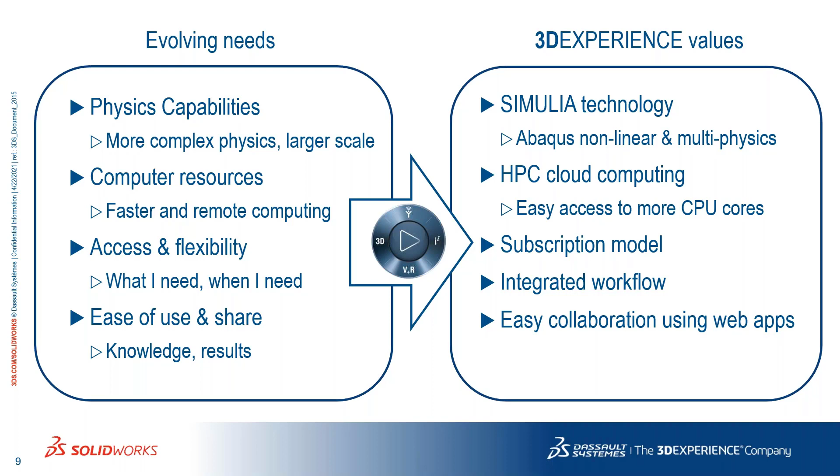So basically, as I already explained, Simulia is a trusted technology, and it is a finite element software which we are using for solving multiphysics as well as very complex nonlinear analysis works. And why this cloud computing is very helpful right now, that we're going to study now.

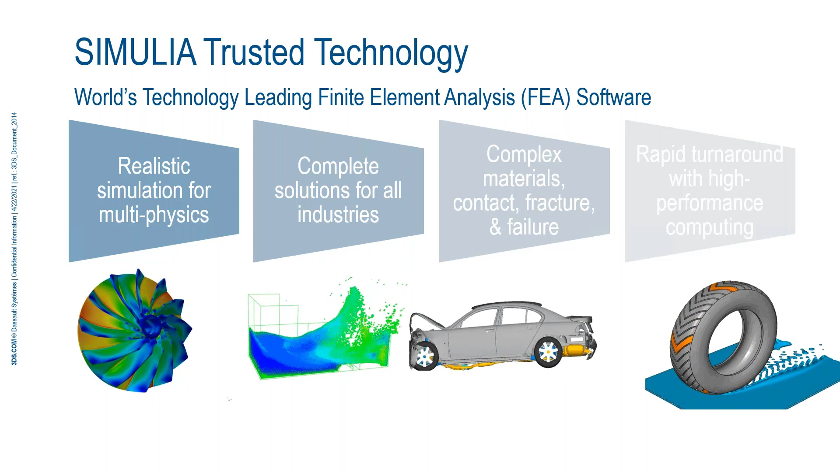Basically, Simulia is governed by Abaqus. It is powered by the Abaqus solver, and it is known for the high-end solution which is required for complete analysis of nonlinear problems, which includes various types of nonlinearity. It is also very good at solving implicit and explicit analysis on your products, which is required to perform dynamic vibrations, to understand and predict the failure of your products when used in real-time conditions. So that is a brief introduction about Simulia.

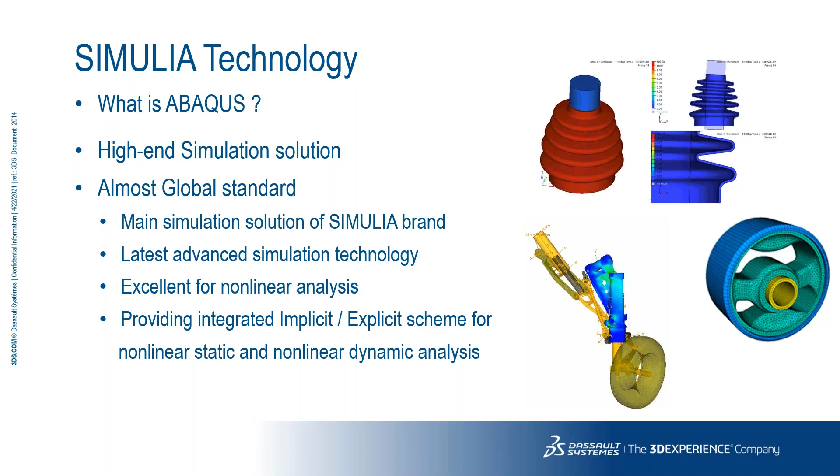So this is basically what we offer to you in Simulia. It comes in 3 different roles: structural designer, structural performance engineer, and structural mechanical engineer roles. So basically, you are going to get a complete solution depending upon requirement. These are different roles, segregated.

Like most of you are SOLIDWORKS users, you understand we also have a different segregation of capabilities based upon different verticals. Here also, based upon different vertical requirements, Simulia or the 3D experience has come up with a solution which is segregated as structure designer, performance engineer, and mechanical engineer.

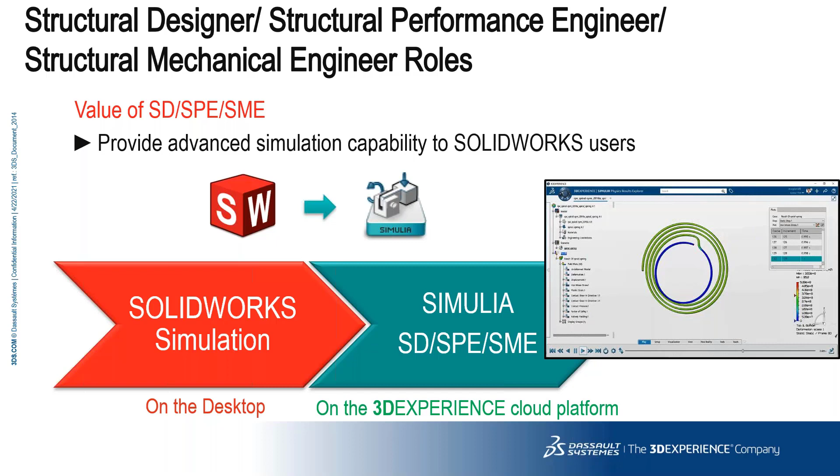So basically we are going to create or design the models inside SOLIDWORKS. As you already have SOLIDWORKS, with just a button you can upload that data to the cloud, and you can perform the analysis also.

So how does data import happen in case of a simulation connector? If a SOLIDWORKS user is already there, you can use it for loading this data from the desktop to the cloud. So basically, in various CAD imports, you can directly import it. We can add mesh creations, boundary conditions, and finally solve it and do post processing. So this is direct import.

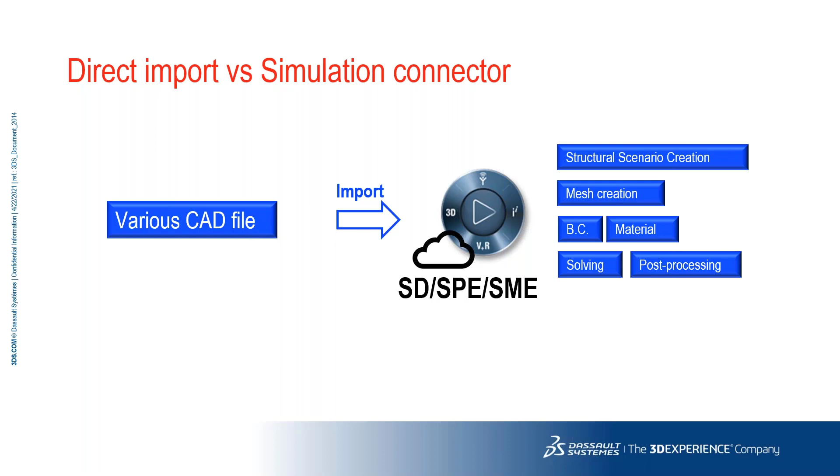Also we can do it inside Simulia, if you're having a SOLIDWORKS simulation already available and you require a higher end solution related to hyper elastic models, you can take help of Simulia, where it will help you directly import all this data, like material, mesh data, boundary conditions, whatever you applied in the present model itself. So it will take that out, and you can directly run that analysis and see the results. This saves a lot of time in replicating the same setup again.

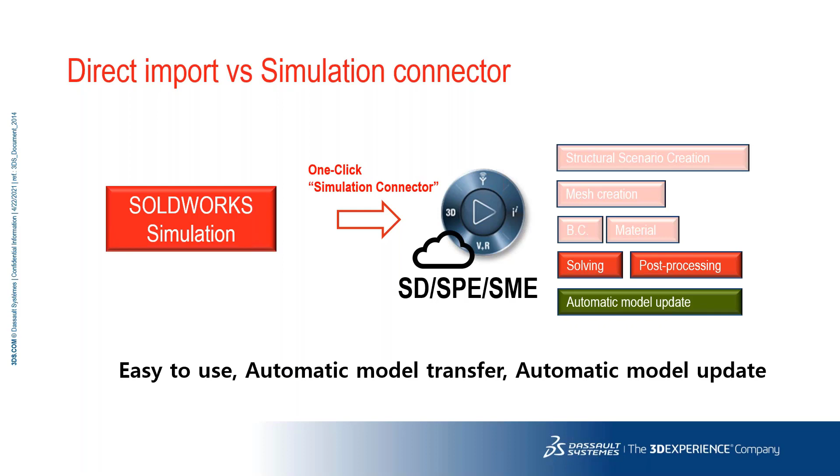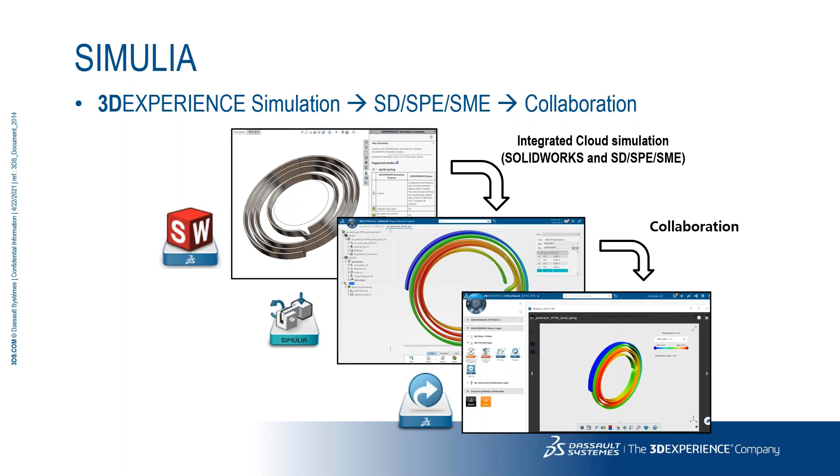It is easy to use and very automatic in model transferring. If you have any model changes to update, it will run very fast in a few clicks. So this is the workflow you are seeing here. This is a model which has a simulation, suppose you have already set up and assigned all the material properties and boundary conditions. You'll get options where you can just click on the button here. This is one tab you get, the simulation connector. Once you click on that, it will be uploaded to the cloud, and finally you can run there itself. So it seamlessly collaborates with SOLIDWORKS, with Simulia, achieved just by a simple click of a button.

Before going to the further part of the webinar, I want to introduce you to the different roles and their capabilities, which you can utilize for your analysis work.

So we begin with the structural designer role. This is also a cloud-based solution offered by the 3D Experience platform. It is meant for performing linear static analysis. If you want to find the natural frequency, do modal analysis, buckling analysis, or steady state thermal analysis, you can easily use this role. It comes with various types of applications which will be helpful for editing or converting from one format to another.

Like we have a converter to IGS, for collaboration, you want to see that for one revision cycle to another revision cycle. So all these applications, what Praveen sir explained earlier, you can easily include and use them for your analysis purpose.

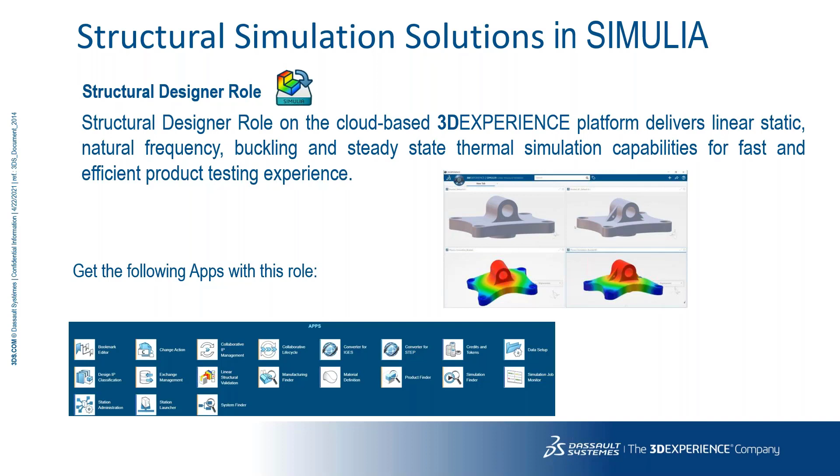So structural performance engineer is the next level above the structural design engineer. It includes all the capabilities the structural designer can do. Along with that, we can perform nonlinear, dynamic response, implicit analysis here. All the other capabilities like static analysis, frequency, buckling are also included. Along with that, you can do implicit dynamic analysis. So this is very good.

It's an important role which will help you design products dealing with vibration related issues. You know how much time it takes to run a vibration analysis on the desktop, whether it's response spectrum, random vibration, or harmonic analysis. A lot of vibration analysis takes a lot of time, so this solution from SIMULIA will help you reduce that time.

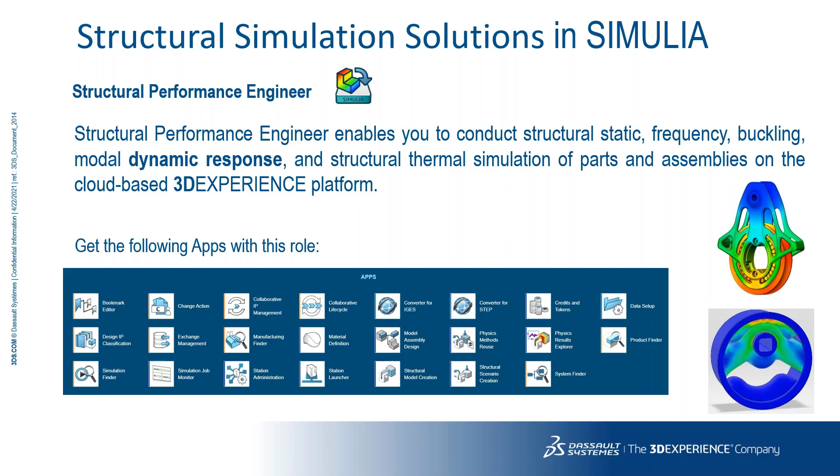So structural mechanical engineer is the next level above the structural performance engineer. As I said, you can do all the analysis mentioned for structural design engineer and structural performance engineer. Along with that, at this next level, you can do explicit type analysis, like random vibration analysis taken to the next level, where you can do high-end, high-speed dynamic analysis. Many people will come across impact and crash analysis of different products as well.

When you do the drop test, it's one form of crash analysis that requires explicit solvers. The time required for solving this type of analysis is huge, and it takes a lot of effort to give proper contacts and do proper meshing, so that there will be dynamic changes in the mesh from the start of the analysis till the end, which needs to update directly. So it takes a lot of computation time and effort for such type of analysis.

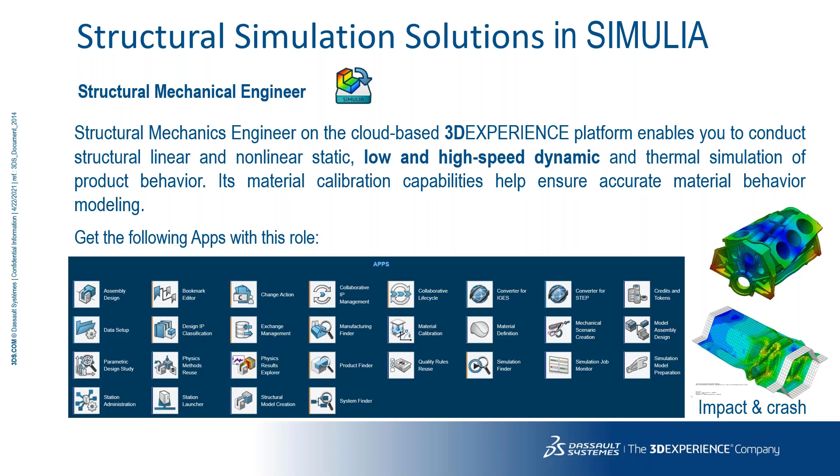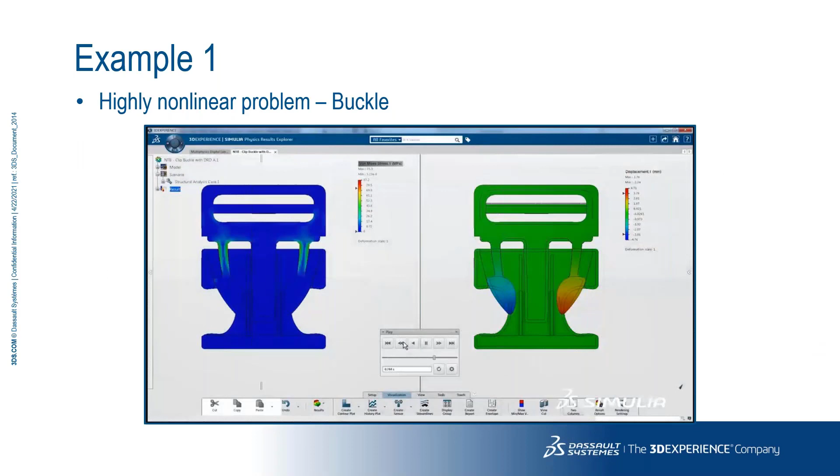This SOLIDWORKS structural mechanical engineering role in SIMULIA will help you address such challenges. So let us go through one of the highly nonlinear problems which we come across in day-to-day work, like a clip and buckle. It is highly nonlinear.

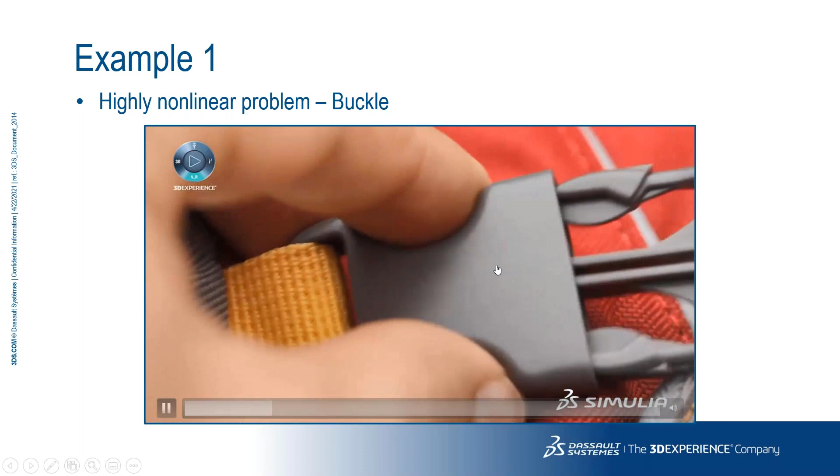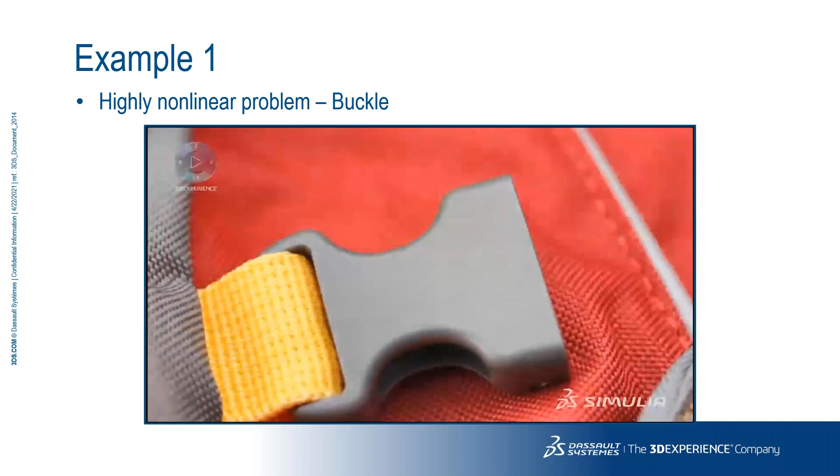As you see, whenever you apply a load, we are trying to add a clip here and inside the buckle, you are going to press it. You see it's going to slide, and the contact is changing with respect to time as per the load you are applying. Such things, even though it looks like a very small component, involve a lot of computations to get proper results.

So this is the user interface we see inside the 3D Experience platform, where you find various types of applications, and I'm taking this example of the clip and buckle. This is the user interface you are seeing here inside SOLIDWORKS, and we are going to assign different materials, different boundary conditions here.

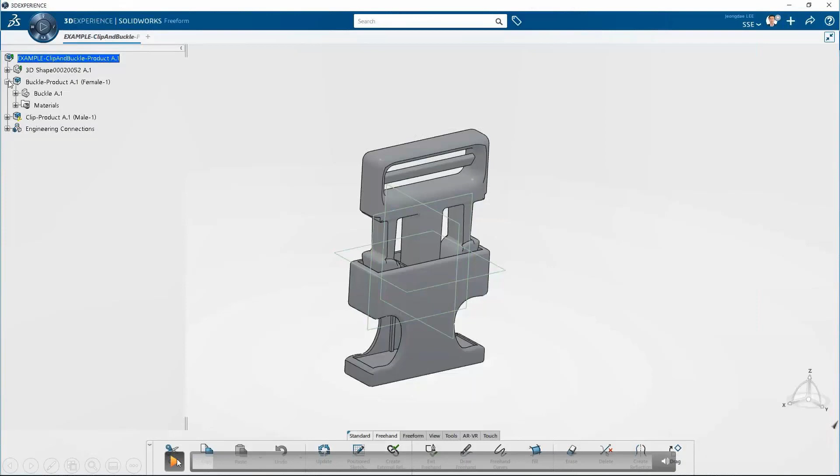Quickly I can go for adding the materials here. I can go for selecting the proper role here. In that role I can select any of the applications. So this is the methodology where we are going to start the analysis. You can do structural, thermal, or both thermal and structural analysis.

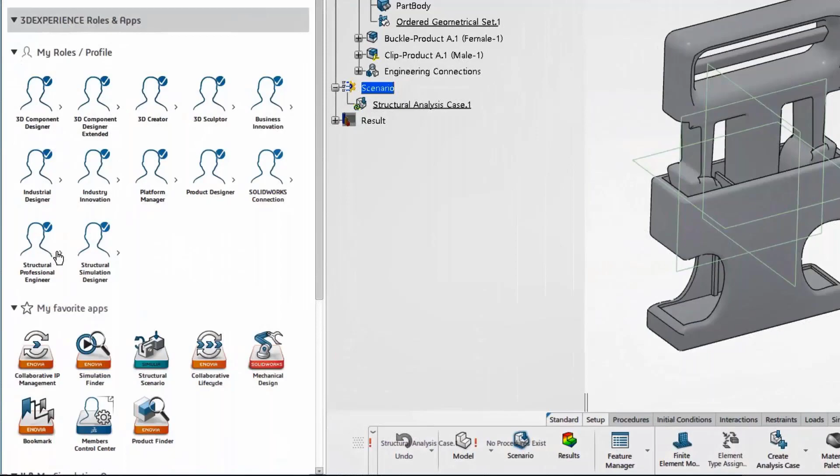Then we are going to add one of the boundary conditions as you are seeing here. I'm going to take the help of the assistants, where I just click here and say, okay, what setup I have to do, what different materials I want to assign. So this assistant will help me do that.

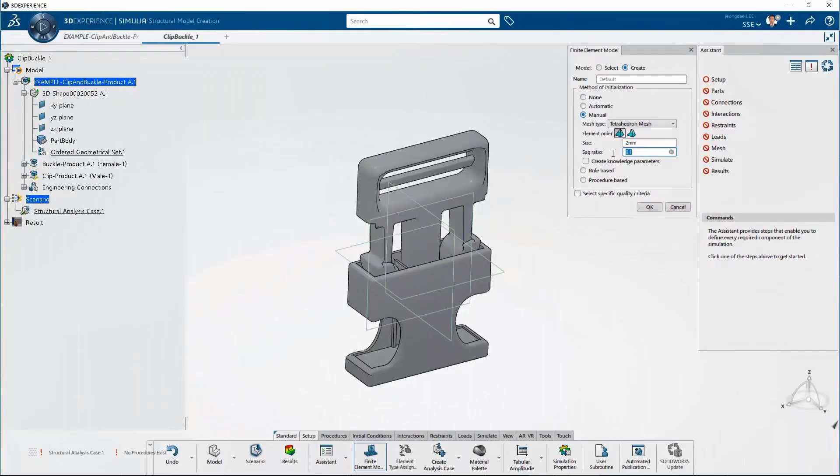I can select any method here, like creating any type of mesh, meshing technology. We have a tetrahedron mesh, rule-based is there. So whatever you ask, most of the meshing requirements can be added here, and you can get proper shape and sizes of your models as accurate as possible.

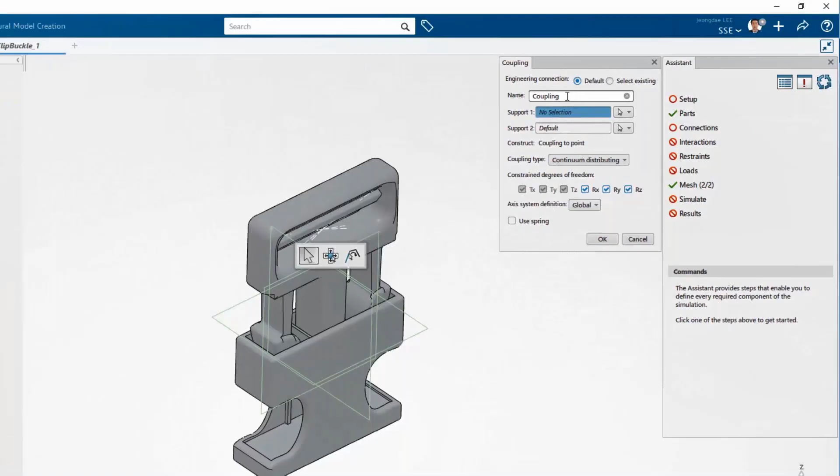Defining the contacts is also very easy here. We have different types of contacts like couplings or tie, which we can add between different components. I can fix it up here. I'm making sure that the boundary condition is such that only the translation along the z direction is kept free, and other directions are arrested.

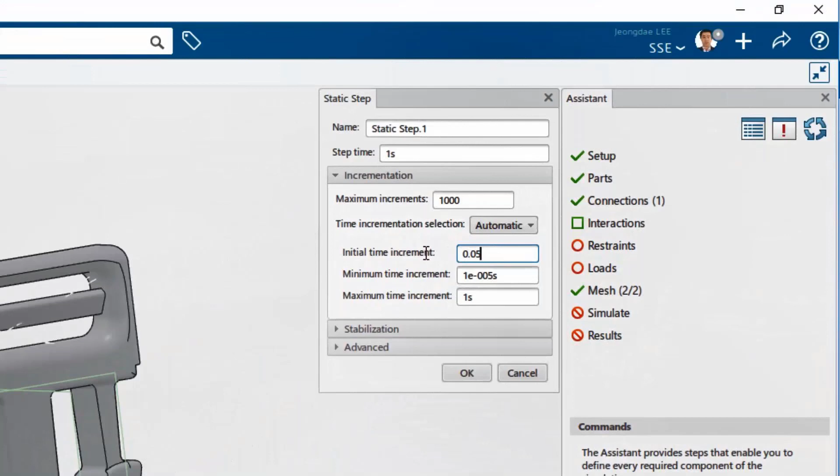I can give the increments also, how much increment, how you want to progress in each step of loading. So once you have done that, I can just go for the meshing, running the analysis, and defining the results. So here I have just defined the friction coefficients also, which is very intricate when you go for it.

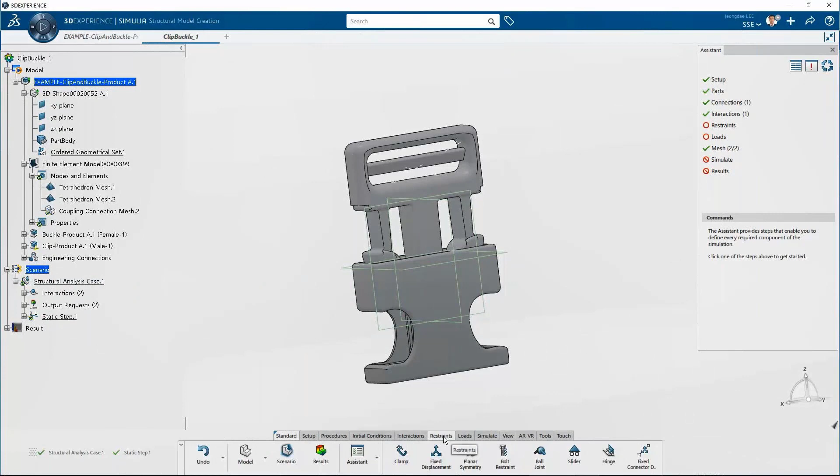One of the greatest savers for a designer is the general contact feature we have in SIMULIA. Whenever the component interacts with each other, it automatically detects, okay, this is a contact, and wherever it touches, even though initially it is not touching, after touching it will indicate that this has to be a contact. According to whatever condition like friction coefficient I have defined, I can easily do it.

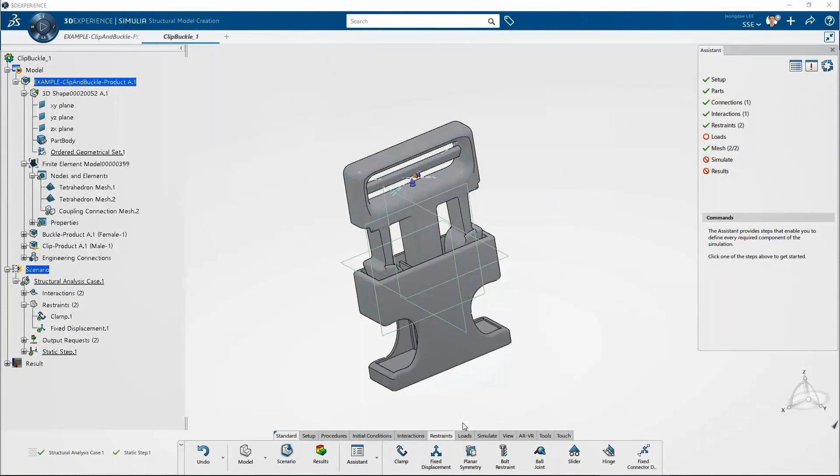So I have applied the load here, in the form of translation about the z direction with 14 millimeters of translation I'm going to apply here. So it's going to act vertically downwards. It is a large deformation problem, so you can see that a lot of clips also will fail due to this large deformation.

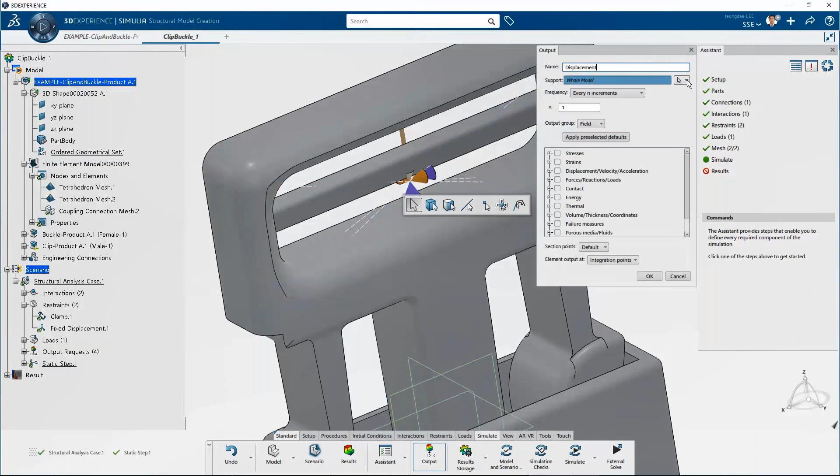After doing all the setting up, I can request for what results I'm looking for, like I want to see the reaction forces, what are the stresses, strains, as well as the displacement in that model. And it is also possible to see it step by step.

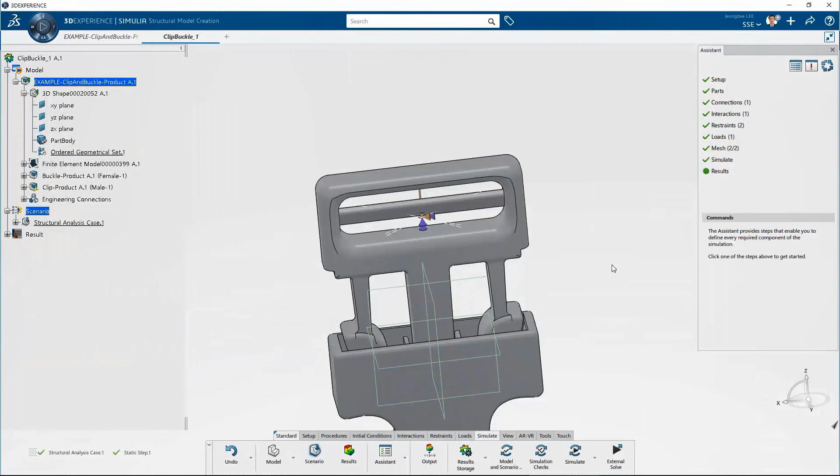One of the greatest things here is that you can run the analysis on the cloud or embedded, where you can include the credits or tokens. And you are seeing here now the results in the form of steps. You will get the results, and you will see how beautifully SIMULIA is going to capture the stresses as well as the strains in each step.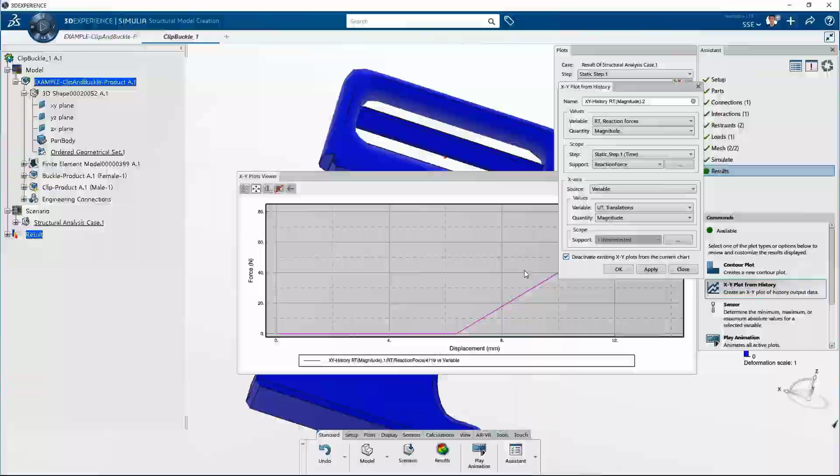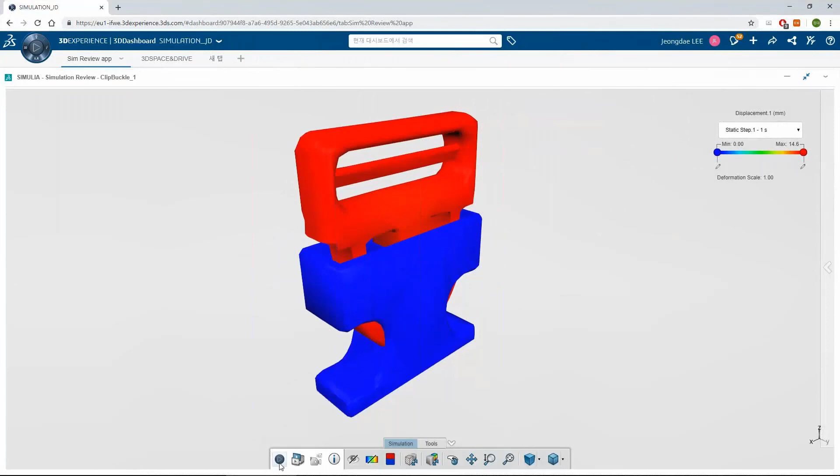You can check it with respect to time also, or force versus time. One of the things we suggested, the 3D experience platform brings us this complete option where I can save and share my details or ideas with my colleagues. If he finds something needs to be changed, he can suggest by going through the animations I've shared along with the results plot. So it's very helpful and seamless for sharing data and collaborating with different users.

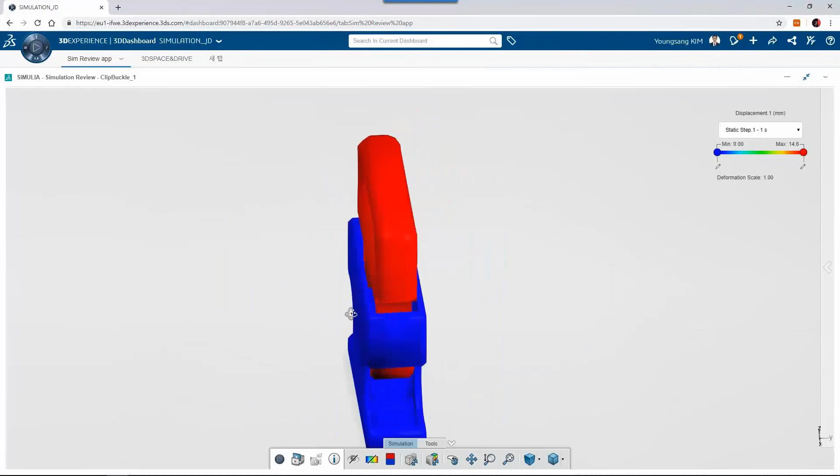At the same time you can also chat and discuss with your team members. You can publish those things, and he can get notifications if it is linked to his email. So this is how complete collaboration happens in case of the model taken inside SIMULIA, while you are performing the analysis.

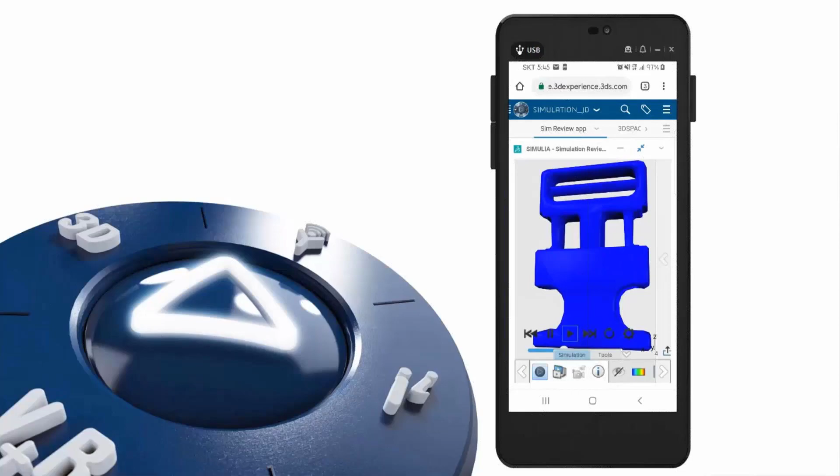Even a person who doesn't have the complete model on a desktop can see it as an application on mobile, where he can also see the results. That is one of the needs now, because not everyone may have the system to check these things. He can check it on his mobile, explore what models are there. This is a 3D play you're seeing, so using that he can explore the complete model.

I hope you got a glimpse of the complete procedure, how the 3D experience platform with SIMULIA collaboration will happen. To continue, let us discuss some of the non-linearities we address inside SIMULIA.

As you are aware, there are three types of non-linearity: geometric non-linearity, material non-linearity, and boundary contact. This is geometrical non-linearity what you are seeing. This is like a material going into the plastic region, and this is a contact type of non-linearity what you are observing here. So all these non-linearities can be addressed inside SIMULIA in the different roles I suggested earlier.

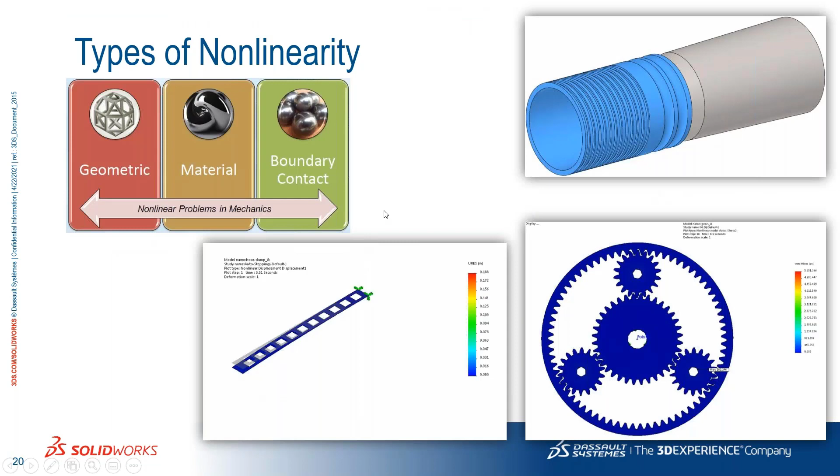As I said, you can perform any of these analyses. It might be one of the things like when you go for any analysis of your products, you might come across these criteria I'm showing now. It can be a large strain problem as seen in beam bending in the first example, and if you have a rubber isolator or any product dealing with large deformation, it becomes very required to check how much deformation is happening so that I can make design changes.

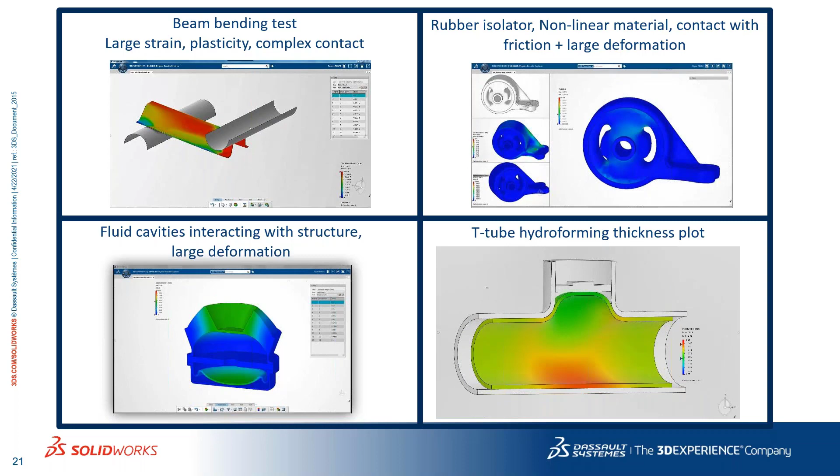So it can be any design, any of these applications, it might be suitable for your work also. It might be hydroforming, complete metal forming solutions you can get here. Not only that, many people nowadays come across required solutions for screws and bolts also. Bolts are one of the criteria where they get failed and other components get freed, which might lead to catastrophic failure.

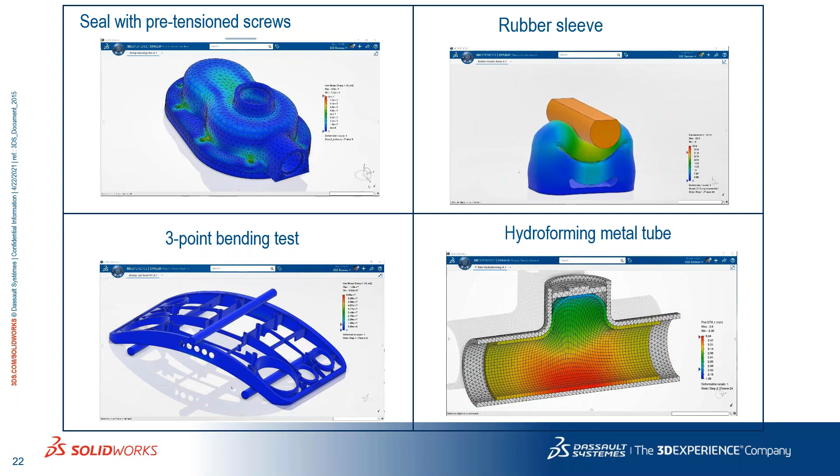And in case of your mobile phones also, what you're seeing is a 3-point bending test, it is very important to see how it's going to behave. And all the rubber or sleeve components you are seeing here, you can use the capability of nonlinear analysis to a great extent.

This is a complete workflow you are observing here when you go for performing any of this analysis. First, suppose you are having SOLIDWORKS. As we are moving from desktops to cloud solutions, let me take you through, if you have SolidWorks, how we take out the model. As I said, there is direct import which I showed in the first example. Now I'm going to show you from SolidWorks. If you want to use this capability of SIMULIA and utilize it for complete designing work, here's how it can be carried out.

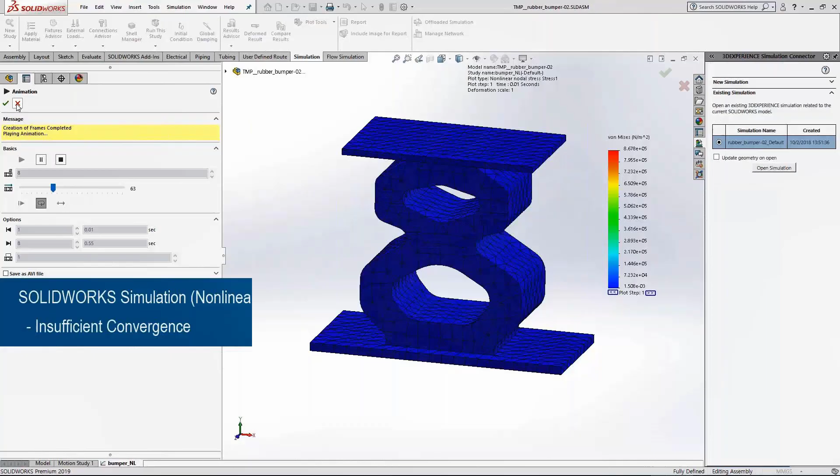So basically, we are going to start this analysis from SolidWorks itself, where I have a SolidWorks simulation with me. SolidWorks premium license is available, but I'm not able to get complete solutions due to the model requirement. I can take out this 3D Experience simulation connector here, which will help me share all my data. Just by clicking, automatically all the data will be uploaded to the 3D Experience platform, and I'm going to get the results from there.

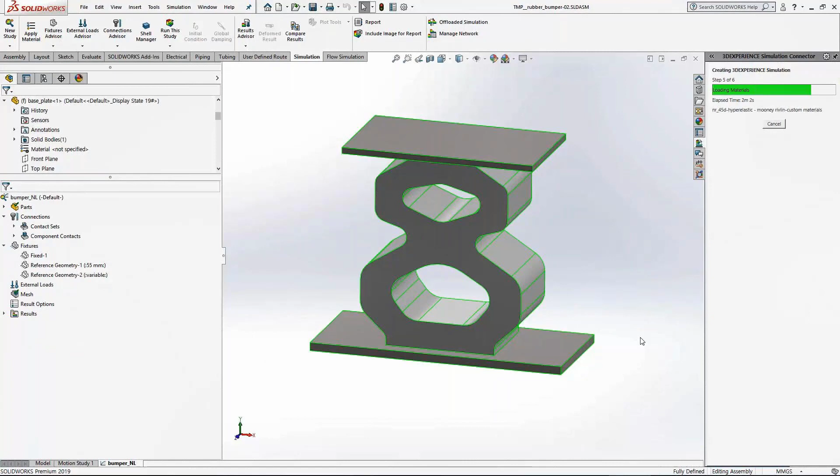So I'm just going to upload all the details here. You can see it automatically identifies the setup, the connections, how things are defined, the loads, and the mesh. It understands all this from the SolidWorks simulation itself, just by clicking that simulation connector.

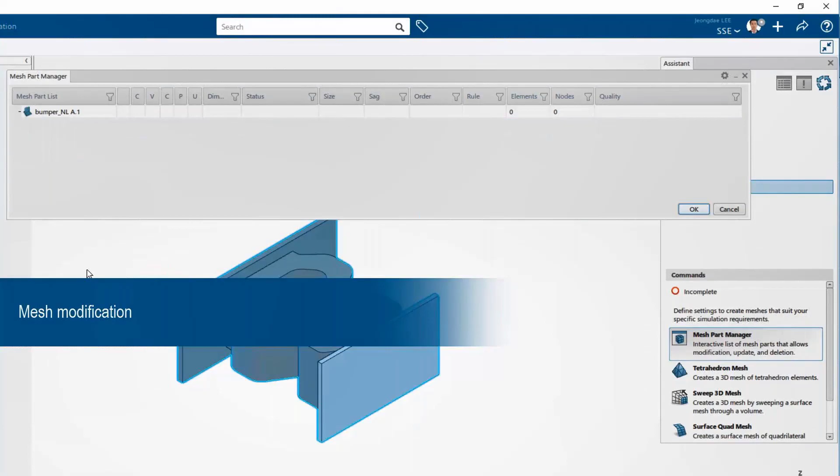I can modify the mesh. If you want to modify it in a much better way, I can delete those meshes and add any type I want, like tetrahedron mesh, sweep 3D mesh, or surface quad mesh. All these mesh types you can add, and we can control how many elements you want along the cross section.

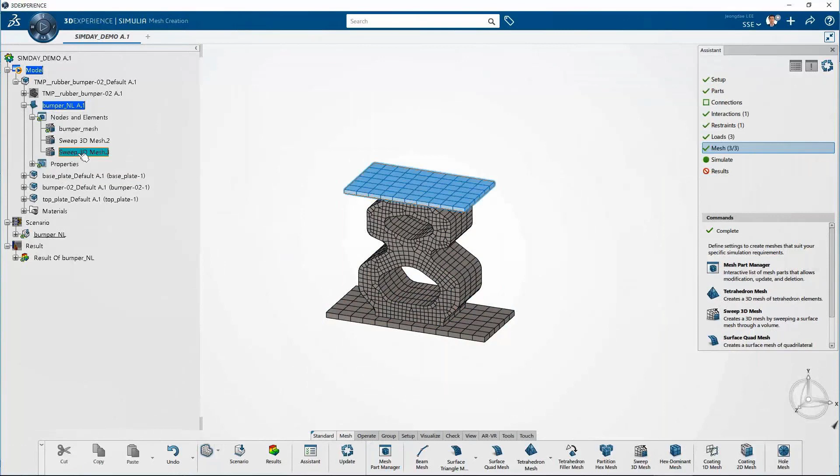You can also go for defining any connections if required. Tie is one of the very good options available in SIMULIA, which helps you select the faces, like what we do in SolidWorks simulation itself. It's going to tie those selected faces, and then I just need to run this analysis.

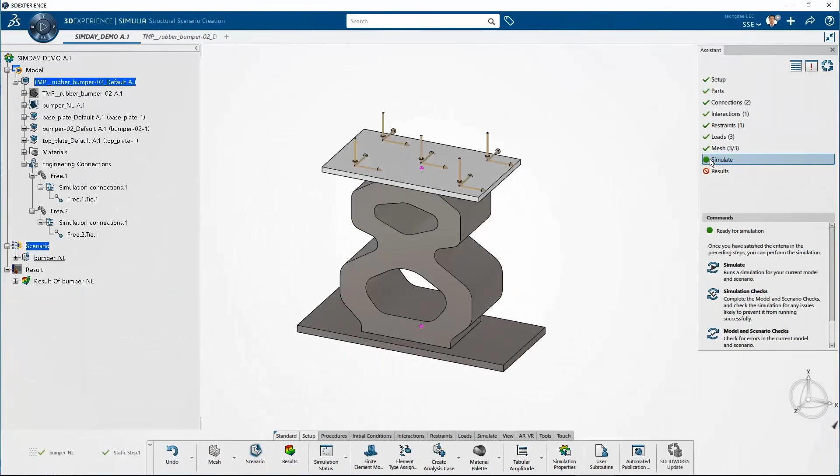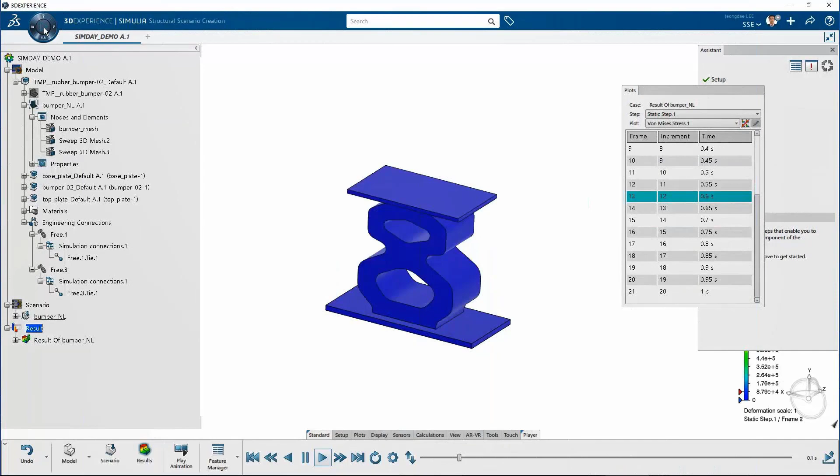Other things whatever I have taken here are already taken from the SolidWorks simulation itself. Finally, I can run it in the cloud. As I said, this is one of the benefits we get, where you can quickly solve very complex and time consuming problems. You can see that in 21 stages it has completed the analysis.

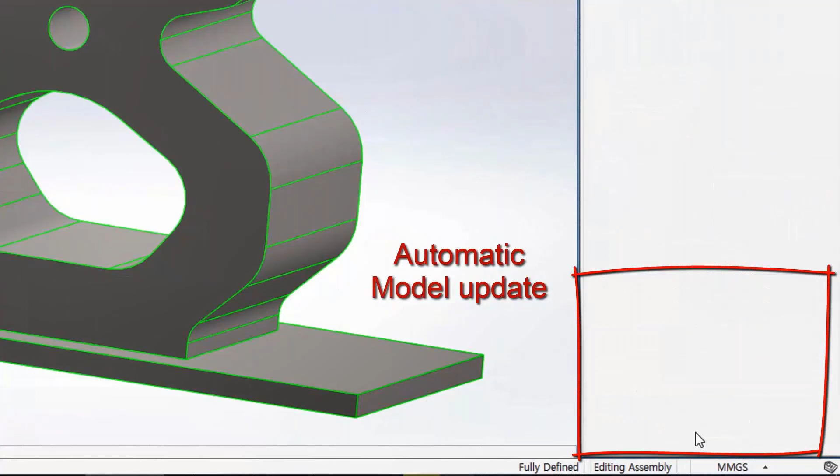And suppose I have a design change, I can just switch to SolidWorks and make the change. Whatever changes are required, automatically it can be updated. You'll get an option: update the geometry on open. When I click this, all the other settings we had earlier will be retained along with the changed model. I just click simulate once again, it will run the analysis for me, and you'll see all the results are similar, or the settings can be utilized, and finally you get the results accordingly.

So it saves a lot of time and effort for us, and it is a seamless collaboration between SolidWorks and the 3D Experience platform.

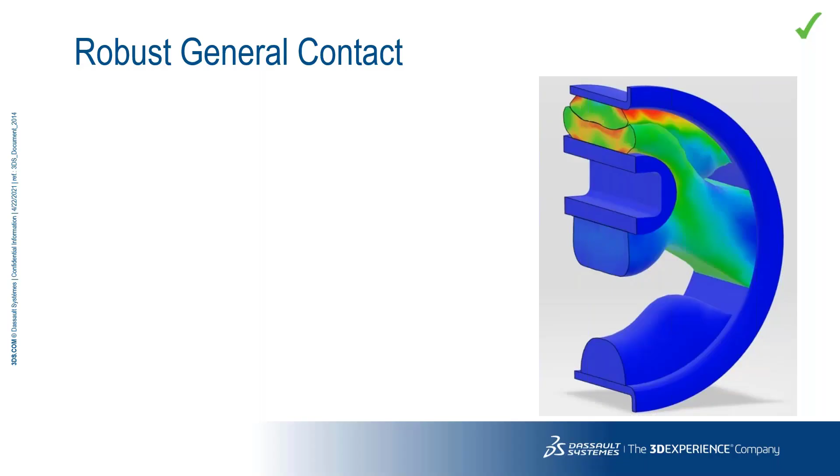So what makes this unique here, again in SIMULIA or Abaqus technology, is general contact, which is very robust in nature. It identifies which component is touching. Once you define the material, with general contact, as an engineer, suppose you have carried out a simple example, you can see how contacts play a part during the analysis.

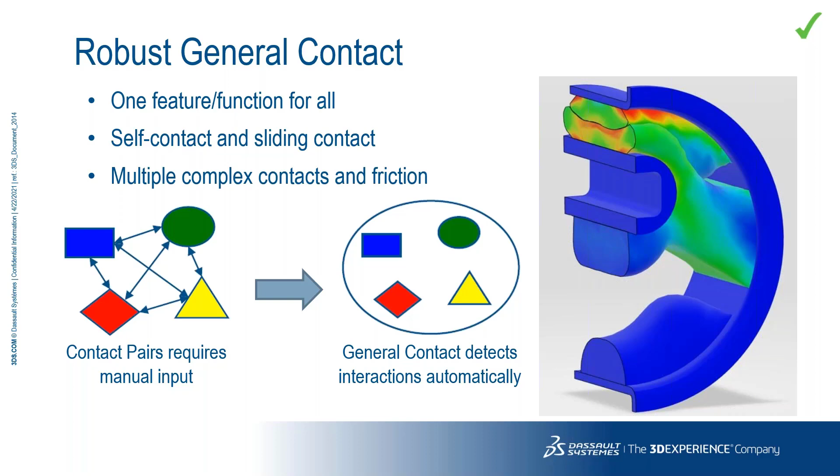It takes a lot of effort and time to define each and every contact. We have to select the faces, it might be edges, or it can be a complete body itself, so it takes a lot of time and effort to define all these contacts. But here in SIMULIA, general contact automatically determines the interactions. I may not need to define any of the selecting faces. I can use this feature to define contacts for the entire assembly itself. Automatically whenever it comes across any components, it considers it a general contact, and it's going to be a sliding contact. We can go for adding friction, and automatically that reduces my work as much as possible.

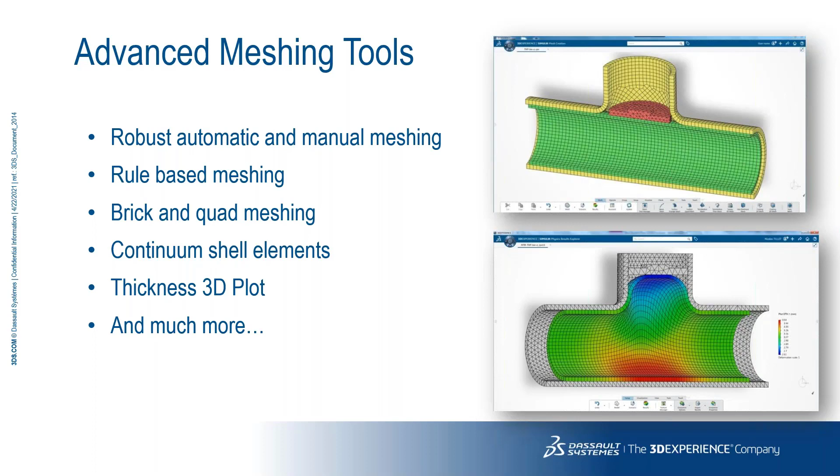What are the various material properties it can handle? It can handle plastic, hyperelastic, or hyperplastic materials. All plastics or rubber materials, it can easily work on. Even for metals, whatever you are having, in the plastic region it can handle with ease, and you can simultaneously see how the nonlinear effects are included while performing the analysis.

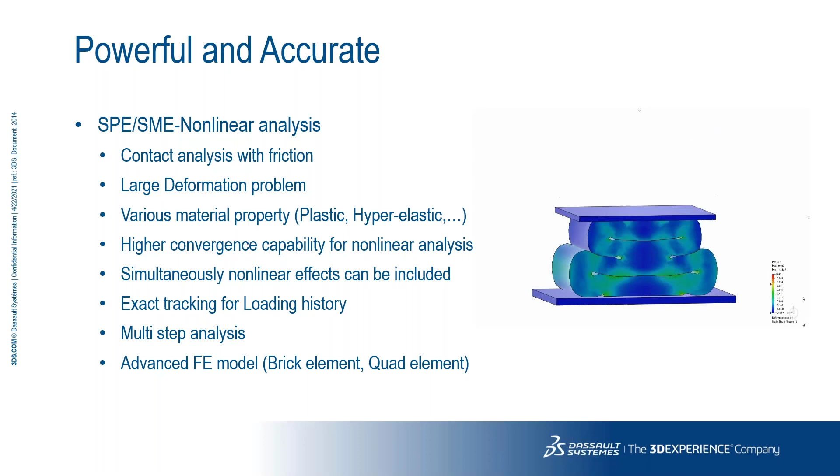We can also perform multi-step analysis. Many people ask, suppose I apply some load here, and after some time I want to apply another load. It's not like I apply say 20 Newton initially, and after running that, it will have some deformation, and then I want to apply load after it gets deformed. Such type of loading, what we call multi-step analysis, can also be carried out in SIMULIA.

It has all the capabilities for the elements to capture, like brick elements, quad elements are there, so they can beautifully capture how the reaction, or the stresses, displacement, or strains are developed in your model.

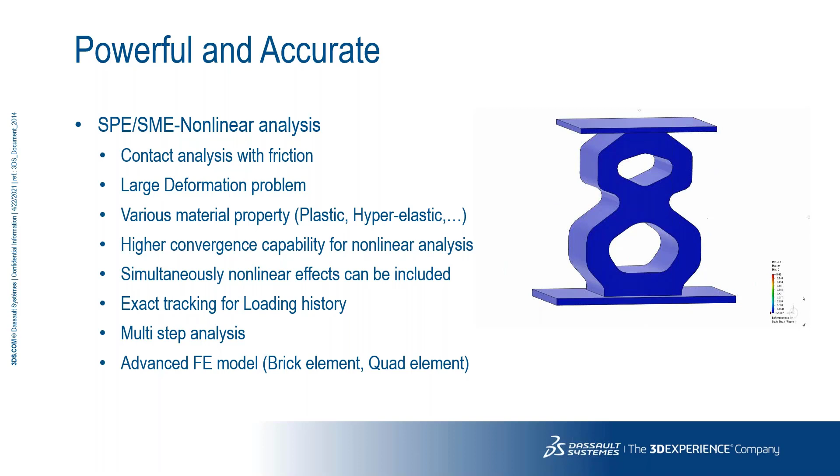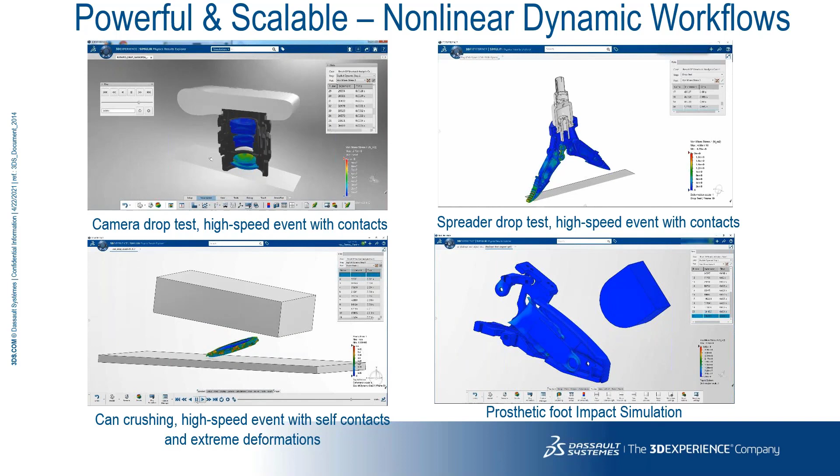As I said, many of us nowadays want to understand how a crash test is going to happen, whether it's a simple can or big cars. If you want to perform a crash analysis, it can easily capture that, and you will get a very realistic analysis, capturing beautifully the behavior of those reactions.

The benefit of running in the cloud is a person can continue working in SolidWorks, and the analysis computation and solving will continue in the cloud. That is how you can increase your productivity.

It's also possible to increase the number of cores, in case of credits as well as tokens. I can buy that. Suppose I have an urgent requirement and I'm restricted to only 8 cores in my system, it might take days of work to get a solution. Instead, if you go for the cloud and buy tokens, you can run that analysis, and it will allocate cores accordingly as per your requirement.

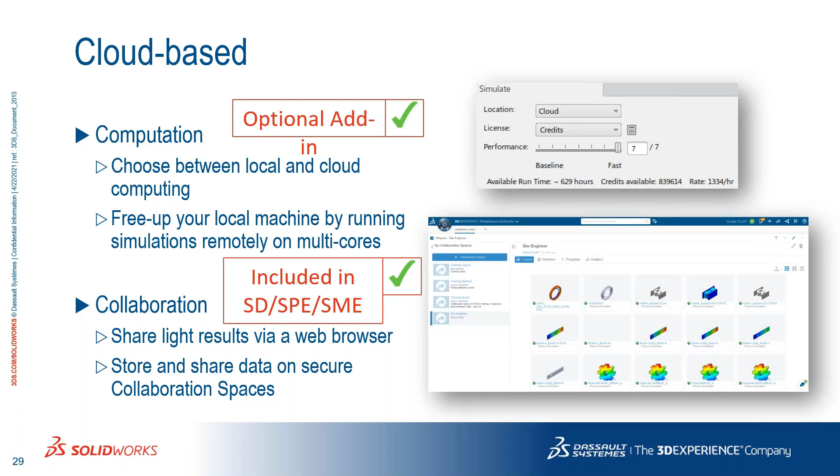Now, dealing with Dassault Systemes cloud security, you'll get some space where you can save your data. So we have SaaS available. This is a simple method, a software usually for delivering data, which you can access from any device having an internet connection, through any browser.

So this SaaS capability is going to be helpful for you, that is software as a service. Similarly, we have platform as a service, cloud computing available. This will help you manage and run any of the applications which you get along with the 3D platform, or if you are going for any of the roles of Simulia.

So you can work on them, and you need not worry about maintaining or building any of these applications. You can just use it as it is and work on it. Similarly, infrastructure as a service is also a form of cloud computing, used for virtual resources which you can access on the internet.

So all these complete solutions or services are provided by Dassault Systemes, and it is highly secure, where you can use the applications, use the platform, without investing much on your infrastructure, laptops, or other things.

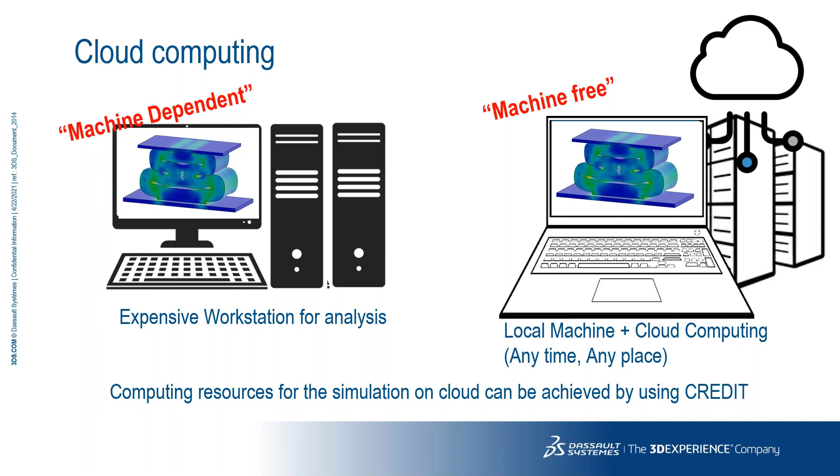For analysis work, we can go for Simulia, where we can perform the analysis at any time, any place, and you can use the resources on the cloud by buying the credits or tokens, and run the analysis much faster than before. You can get rid of whatever we call the machine-dependent nature we are in right now.

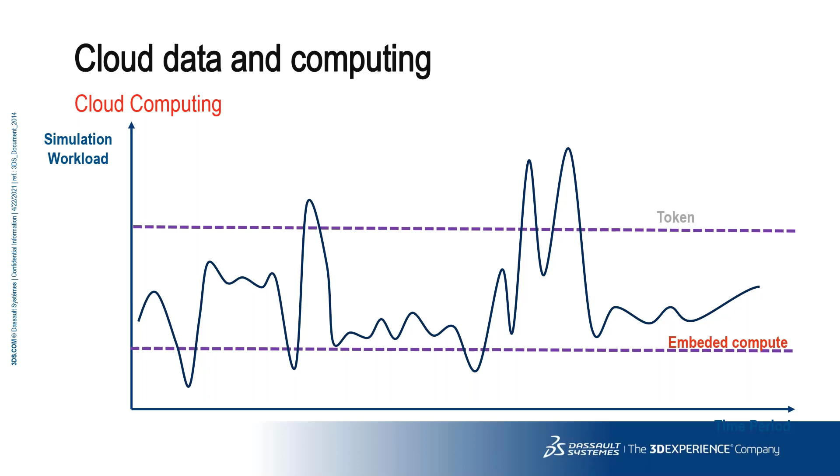So I want to tell you something about embedded compute and tokens, as well as credit. So what you're seeing here is embedded compute, what you are doing day to day. When you're running the analysis in your system, it depends upon what we usually allow, around 4 cores is allowed to run it on the local system.

So suppose you want to run it with more cores, you have to go for the token system or credit system. The token system is nothing but you get access to these number of tokens, and you have to buy these tokens. Each token will execute like a single core basis - 5 tokens are required to consider it as a single core.

So like that, depending upon your computation work, it's going to utilize those tokens while performing the analysis on the cloud. You'll get a credit also. Credit is like, suppose you buy a SIM card, you'll get some talk time.

Whenever it is not a renewable one, it is one-time use. That credit you can use also, once all these runs you are doing. So if while running your project you come across a peak requirement of running the analysis faster, you can take help of this credit and utilize it. Tokens are renewable. You can order as many tokens as per your requirement.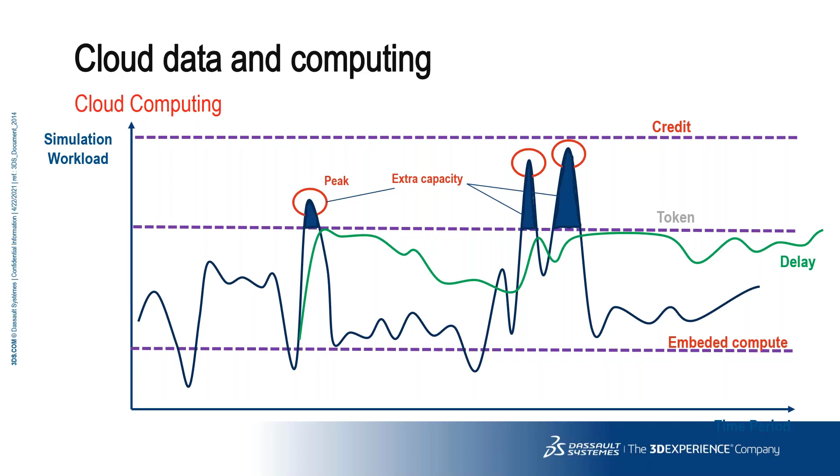So these are the extra capacity. Whatever you want to include, you can include them. In case of credit consumption, you can set the performance also. For example, you might not require very accurate solutions. In that case you can set it as poor condition, where it will take out very less credit to compute. As you go for non-linear and dynamic explicit things, the credit consumption will be more.

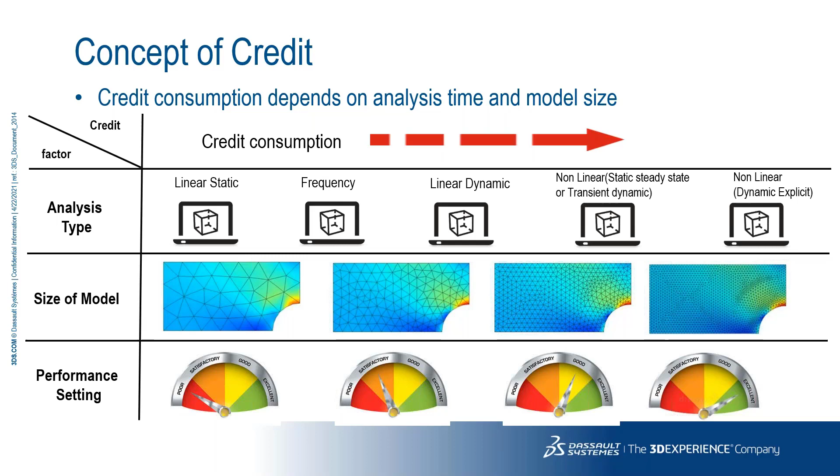For example, here the number of credits consumed is considered as 10, for a linear static analysis. In case of dynamic explicit, it might consume like 100 or 1000 credits also. So depending upon the size of your model, you are going to consume the credits available inside the cloud. As the size of the model changes, once the performance is set, the credit consumption will automatically show you how much credits are going to be consumed, which will be visible for you.

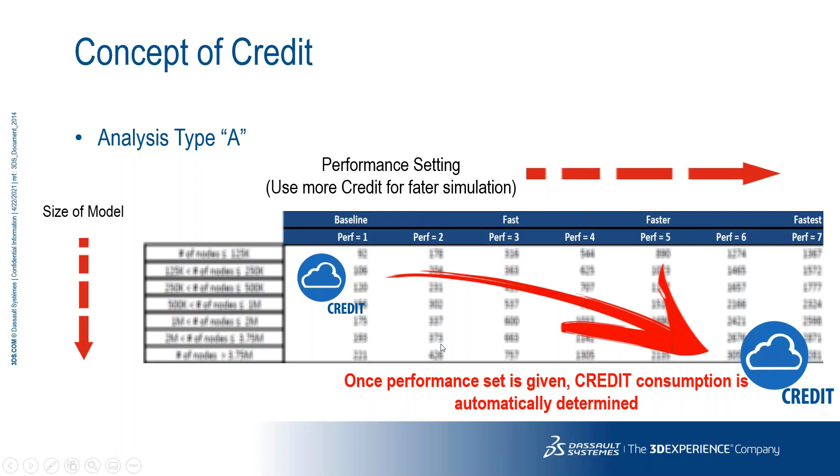So these are some of the customers who have started working on this 3D Experience platform, and they are using Simulia extensively for their work. Hydac is one customer. They used it for the complete analysis of their existing assembly components, where they wanted to see the effect of torque on their components. They used SolidWorks along with Simulia, and they achieved convergence of 100% in a reasonable time, with good information about the failure.

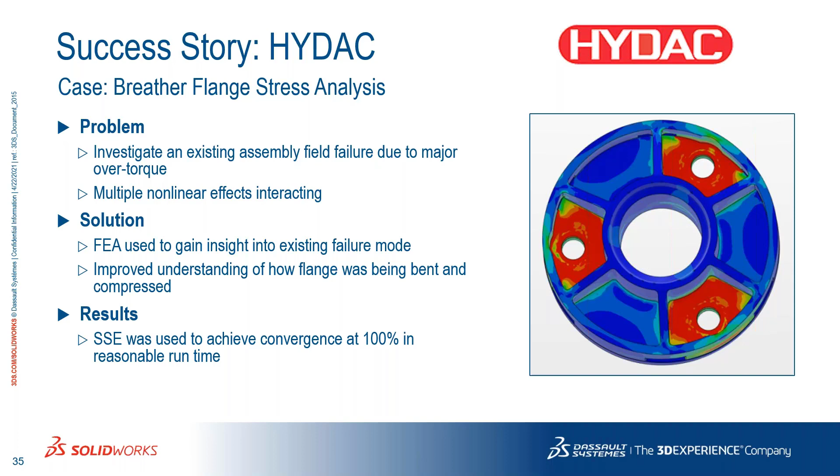You'll find a good distribution of the stresses or strains after the analysis. Up to linear analysis, or not-too-complex nonlinear analysis, you can carry out in SolidWorks simulation. If you are looking for very high-end complex analysis requiring a lot of computation time and a very good system, in those cases Simulia, such as Simulation Engineer or Performance Engineer, you can use for solving that problem.

One more customer used it for microfluidic devices, to investigate the behavior of rubber under compression and how the complete device will work. If you take a comparison, it takes around 40 minutes to solve in Simulia, while in SolidWorks simulation it might take 21 hours. It may not run in many cases, because it all depends upon the complexity of your models and your system. So using Simulia, they got the complete solution in just 40 minutes, giving a comparison of how much time you can save while performing the analysis in these scenarios.

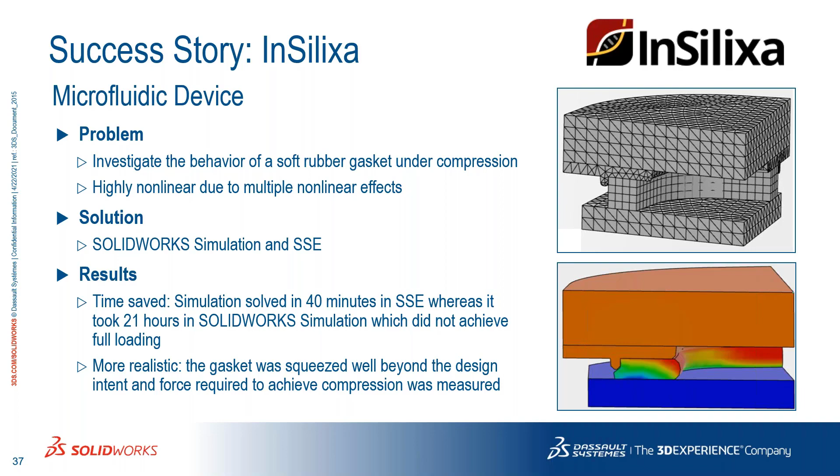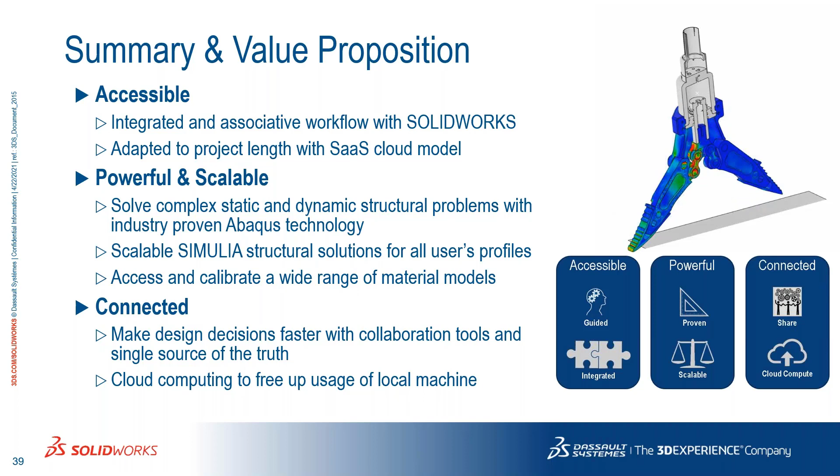So, summary: we have seen how SolidWorks and the 3D Experience platform with Simulia give you accessible, integrated, and associative flow, and you can also take help of SaaS as well as platform-as-a-service options to complete your designing work. We can scale up from static to dynamic problems, which require implicit and explicit analysis. You've also been introduced to the SolidWorks and Simulia collaboration through the 3D Experience platform, and how easily you can share your data or designs and work on them.